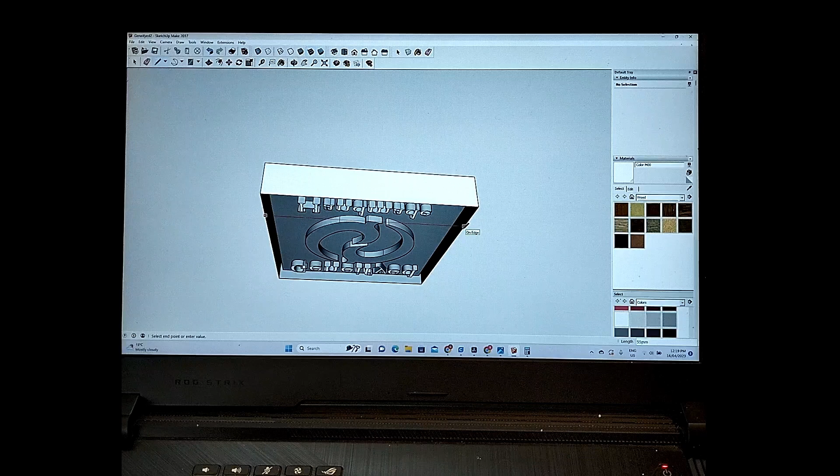Rightio, so there we have it. That's our negative mold. So once we fill that up with the rubber, we've got ourselves a stamp. So quickly, just to calculate the volume of what we're going to need, I've made these sides 6mm. I'm only really wanting to fill it up 5mm so I can get a nice flat top on it so I can stick it to a piece of timber.

That's 53mm. 63mm. So we'll get our calculator, and that is the volume because I've already calculated it, but we'll start again to show you the math. So we'll go 5 times 63 times 53 equals 17. So 17. So I haven't calculated for this negative space in the letters, but I don't want to fill the mold either. So if I roughly had 17, that'd be more than enough rubber to cast from.

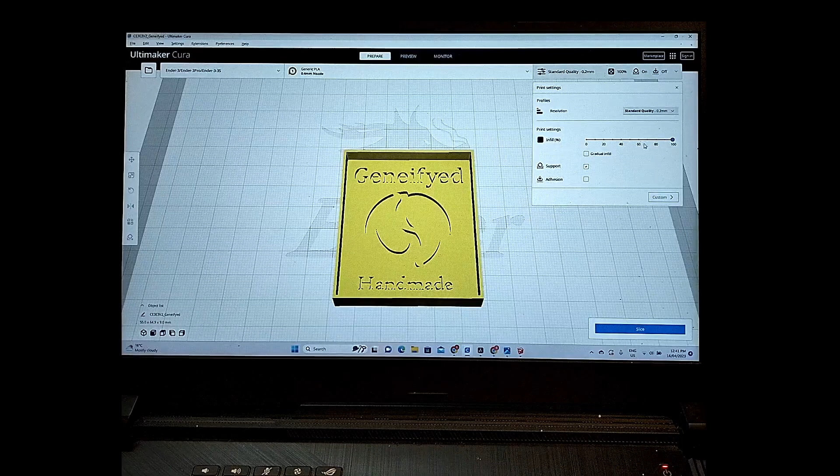Alrighty, I'll send this over to the slicer and we'll get ready for the 3D printer. Rightio, so we've got this in the slicer now. It's set at 100%. So we'll just slice that and have a look and see how it goes. Make sure everything looks the way it should. So this shows basically where the extruder will be and where and when. So if I run back here, you can just see how it shows. And it's building everything the way it should.

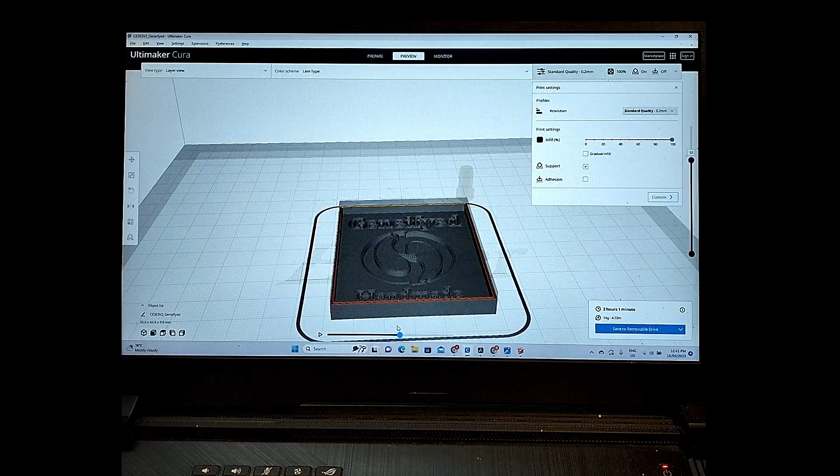We'll run through from top to bottom, just quickly make sure everything's correct. So we can see there, right at level 6, that everything appears at the same time. That means that when the stamp's made, it'll be nice and flat. Solid right through until then.

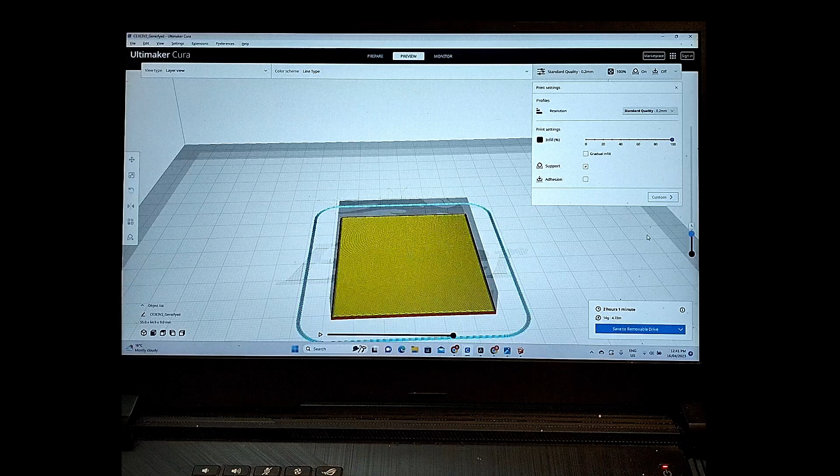Alrighty, cool. So this is a 2-hour print, so you know what, I reckon we might actually change it down to 20%. See if we can speed that print up a bit. We don't need that much material. It'll shave an hour and a half off. Right, yeah, I think that'll do the trick. So I'll save it and I'll send it over to the printer and see how that goes.